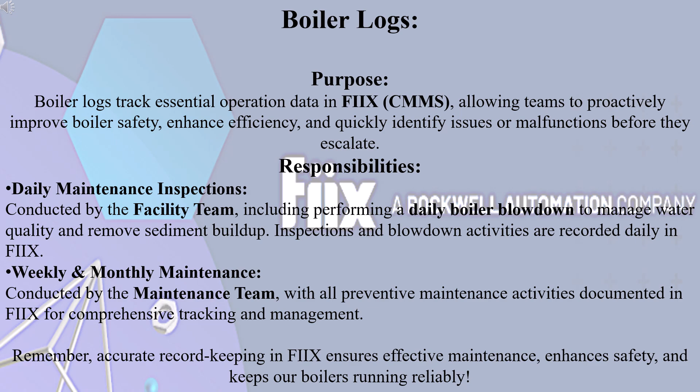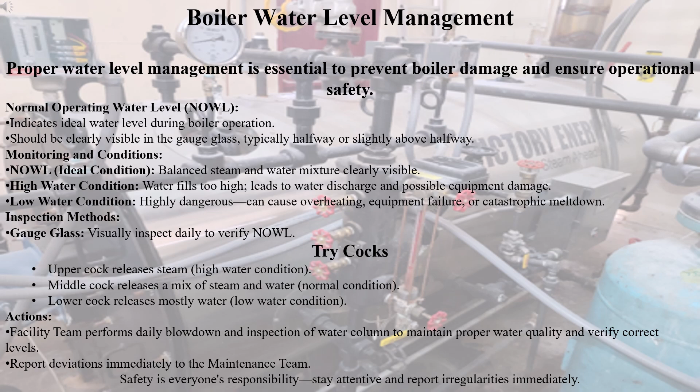Daily boiler blowdowns are a key step in safe boiler operation. At our facility, the blowdown procedure includes two main tasks. First, a bottom blowdown is performed to clear sediment, contaminants, and minerals from the boiler's lower section, preventing corrosion, scale

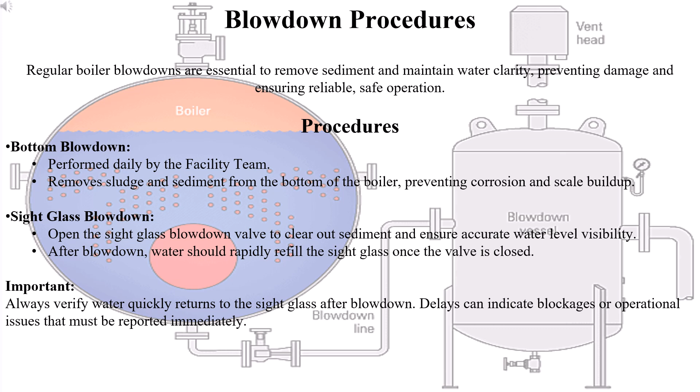buildup, and potential blockages. Next, we perform a sight glass blowdown to ensure the glass remains clear and accurately reflects the boiler's water level. When this valve is closed, watch carefully. The water should rapidly refill the sight glass. Slow refilling could indicate a blockage or malfunction. Remember, performing these blowdowns daily ensures our boiler runs safely and efficiently. Keep your eyes open. Your diligence protects everyone.

Performing a bottom blowdown correctly is critical to maintaining boiler health and safety. This procedure removes harmful sludge and sediment from the boiler's bottom, protecting it from corrosion and buildup. Always perform a bottom blowdown under a light boiler load. First, fully open the quick opening valve. Then, slowly open the second slow opening valve. This valve is designed specifically to handle the main blowdown flow and minimize valve wear.

Closing valves must also be done in reverse. Shut the slow opening valve first, then the quick opening valve. Skipping or reversing these steps can cause a dangerous phenomenon called water hammer, a violent surge of water that can damage pipes, fittings, and valves, creating significant safety hazards. Following these procedures carefully keeps our boilers safe and equipment protected.

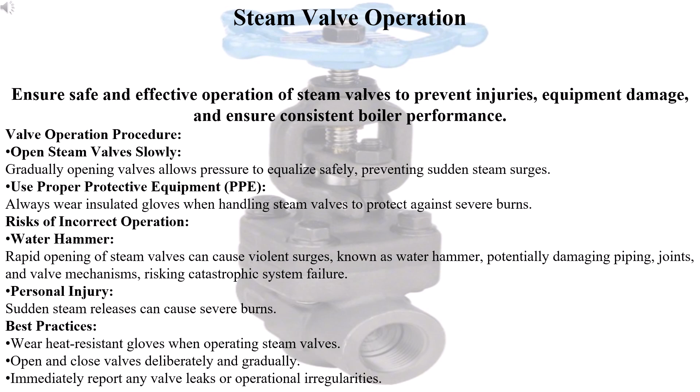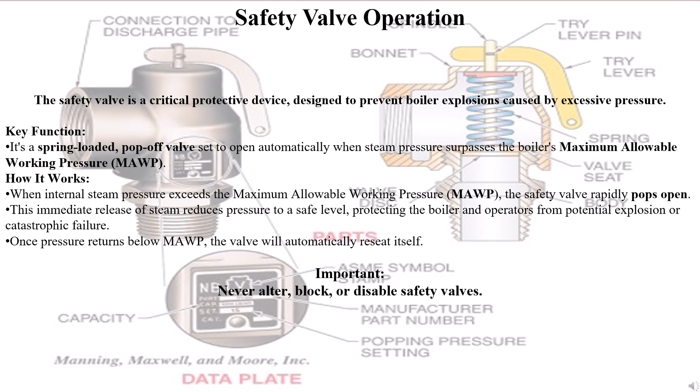Never tamper with, block, or alter safety valves. These devices are essential to keeping everyone safe. Always report any irregularities immediately.

Burner controls and safety valves are your boiler's frontline defenses against dangerous malfunctions and potential disasters. Burner controls continuously monitor the boiler's flame conditions. If the burner loses flame or combustion becomes unsafe, these controls immediately shut down the system, preventing dangerous scenarios. There are various safeguard systems such as UV sensors, flame rods, and infrared sensors, and each type must be tested periodically to ensure reliability. Safety valves are just as critical.

They're spring-loaded and set to pop open automatically whenever steam pressure exceeds the boiler's maximum allowable working pressure. When this happens, excess steam is rapidly vented, quickly bringing pressure back to safe levels. Never attempt to alter or disable these essential safety features. Regular inspections and testing keep our boilers running safely and effectively, so let's stay diligent and keep safety first.

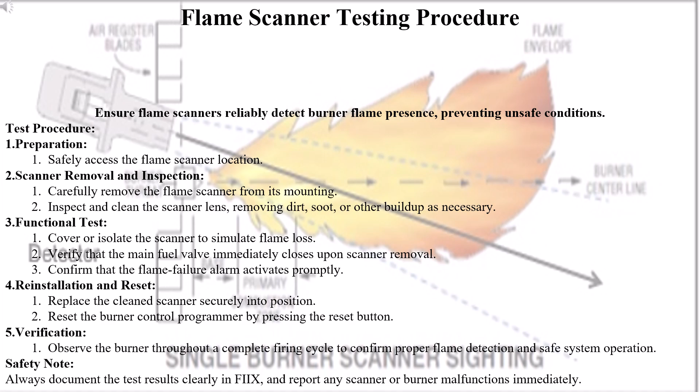During testing, the scanner is removed and blocked from detecting the flame. At this point, the boiler's safety system should respond immediately, closing the main fuel valve and triggering the flame failure alarm. After cleaning and reinstalling the scanner, reset the burner control programmer by pressing the reset button. Closely monitor the burner throughout a full firing cycle to verify correct scanner operation and confirm system safety. Regular flame scanner testing keeps operations safe, so always take this step seriously and document your results.

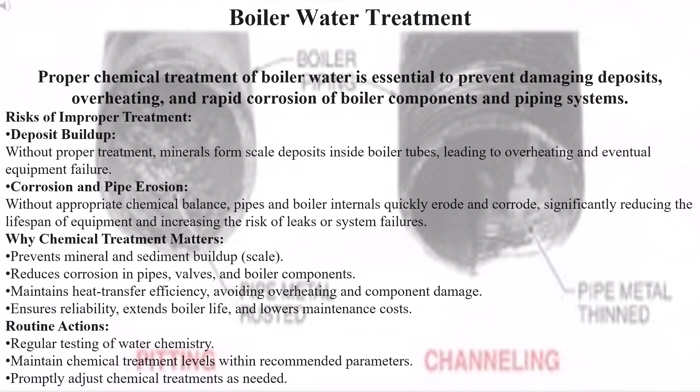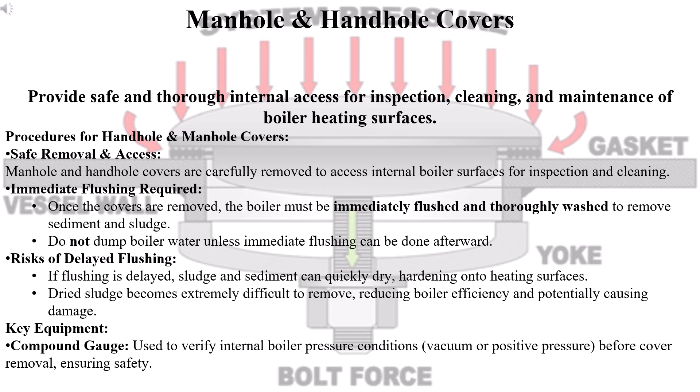Preparing your boiler for inspection is a vital step to ensuring ongoing safety and compliance. Before the inspector arrives, both the fire side and water side of the boiler must be thoroughly cleaned to remove sludge, sediment, and buildup. Safely remove handhole and manhole covers to provide clear access for a complete inspection. Always check the compound gauge beforehand to confirm safe pressure levels before removing these covers.

Remember, if you've dumped boiler water, it must be immediately flushed to prevent sediment from drying and adhering to internal surfaces, which can be extremely difficult to remove later. Once you've thoroughly cleaned and prepared the boiler, immediately notify the inspector to proceed with the inspection. Staying proactive helps ensure our boilers are safe, efficient, and inspection-ready every time.

Lockout-tagout, or LOTO, is essential for safely performing maintenance and preventing serious injuries from unexpected equipment startups. A lockout physically disables equipment by using locks or chains, preventing accidental energization. A tagout, on the other hand, uses clearly marked danger tags attached directly to the power source, signaling that equipment must remain off. While tags don't physically prevent startup, they provide crucial warnings to personnel. Remember, only authorized personnel can remove lockout-tagout devices. Always respect these safeguards, your safety depends on it.

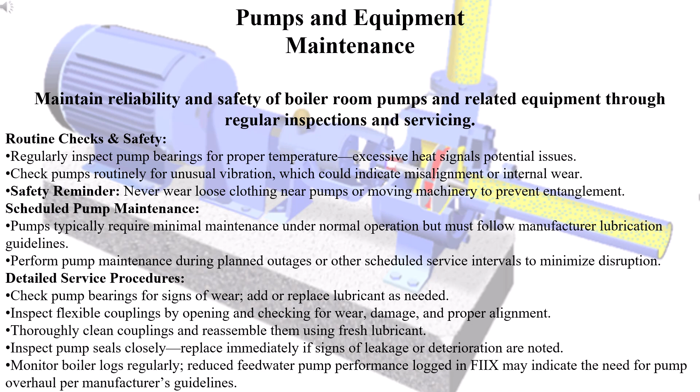Steam traps play a crucial role in protecting our feedwater pumps from becoming steam-bound, a condition where the water being pumped overheats and turns to steam. Since feedwater pumps can't handle steam, it's vital to quickly address and correct this condition. If a pump becomes steam-bound, the first step is cooling down the feedwater. This can be done by adding cooler makeup water to the condensate return tank. If the issue continues, carefully pour cool water directly onto the pump casing. Be cautious to avoid the pump's motor.

Always test the steam traps on the condensate return line regularly, using a handheld thermal temperature device. Faulty steam traps can lead to excessively hot water and recurring steam-bound conditions. Stay attentive, perform regular inspections, and quickly report any steam trap issues to keep our boiler room safe and efficient.

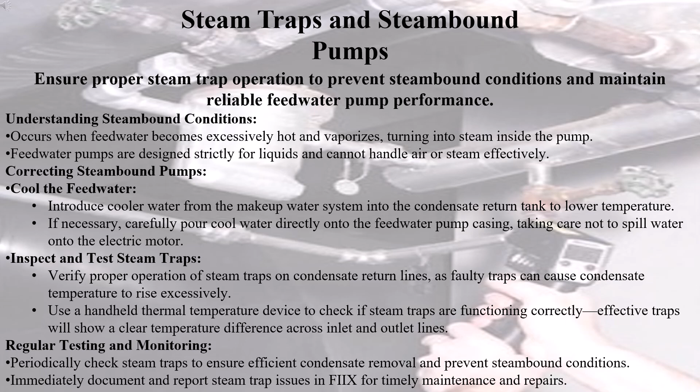Priming and carryover might sound technical, but they're problems everyone should recognize. Priming occurs when large quantities or slugs of boiler water surge into the steam lines. Carryover is similar but involves smaller water particles traveling into the steam system. Both conditions often happen due to rapid steam demand, excessive water levels, or impurities in the boiler water. They can also result from quickly opening the main steam valve, causing sudden pressure fluctuations.

These aren't just minor issues, they can severely damage steam lines, valves, and expensive equipment downstream, causing corrosion, contamination, and reduced efficiency. To prevent these conditions, carefully control water chemistry, maintain proper water levels, and open valves gradually to avoid sudden pressure changes. Be aware and act carefully. Keeping water out of our steam lines keeps our equipment safe and running smoothly.

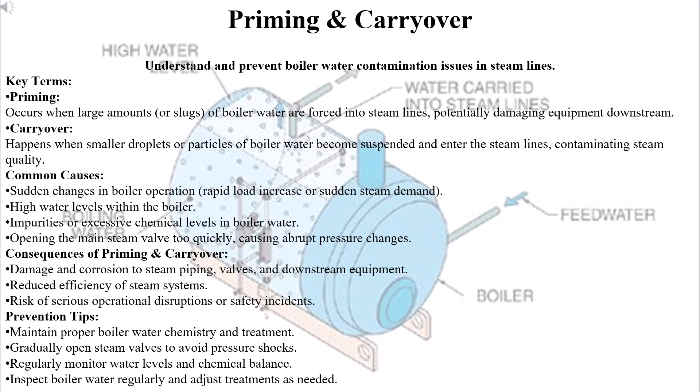In the event of a fire, immediate and correct action is critical. Every boiler operator and team member must know the fire safety plan clearly. Our fire safety plan outlines exactly what steps to follow during an emergency. It details the location of all fire alarms, extinguishers, emergency exits, and the main electrical breaker. It also identifies where the fire main shutoff is located, allowing quick response to prevent further hazards.

Every employee must complete annual fire extinguisher training. This ensures you're prepared to act decisively in an emergency. Additionally, team members tasked with operating the main electrical breaker receive specialized electrical safety training to minimize risks during emergencies. Know your plan, know your role, and stay ready. Your preparedness could save lives and property.